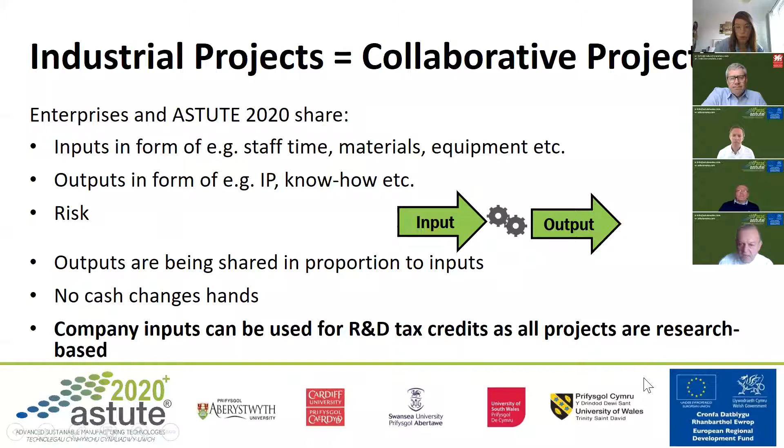Next slide, please. I think that's the end of my presentation, and we'll go now back to James.

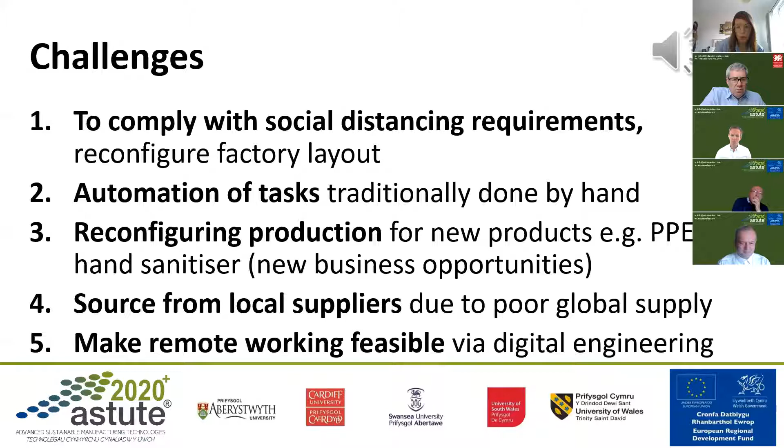So what we have done here with these opportunities is translate some of those COVID crisis-specific challenges into generic opportunities, things we may have done ourselves anyway in order to achieve operational excellence and continuous improvement, but sometimes the crisis actually gives us the motivation to do things more quickly. So for example, with regards to the first one, relating directly to the previous challenges from the previous slide.

With regards to social distancing, looking at our factory layout and ways to streamline our material flows and process flows gives opportunity to improve in terms of reducing non-value-add activities and enhancing the value add throughout our total manufacturing process.

With regards to automation and enhancing automation, looking at robotics, for example, to reduce material handling, the opportunities offered by our research in robotics. We can look at ways to reduce the amount of handling actually required by individuals, and looking at ways for individuals to be working with the robots, a whole systems perspective.

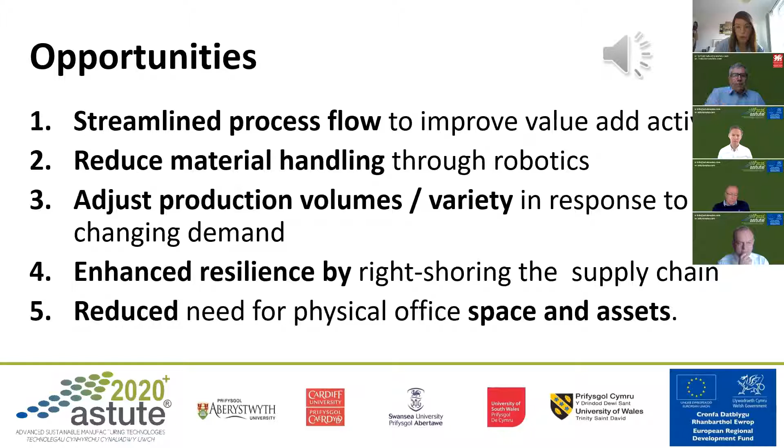What I'll do now, after highlighting these generic opportunities, is give you an overview of some examples, some cases where we've actually applied these manufacturing systems engineering methods and opportunities within specific companies. This gives you an idea of the range of manufacturing sectors that we have worked with.

So the first one here is medical devices, particular pumps for bed sore blankets. In this first example, we looked at new layout and in particular new ways of working, in this case via gravity feeders for materials handling, so avoiding direct contact in terms of relating it to COVID, avoiding direct contact between operators. This kind of gravity feed system and new layout led to productivity improvements.

The next one is an example of braking systems assembly in the automotive sector, the development of cobots, where we have within the same space both operators and robots. The main research challenge there is working safely, and in this case there will no longer be a need for robots to be hidden behind cages.

The next two examples are both different companies, but both analytical equipment manufacturers. The first one, where we looked at understanding and documenting current manufacturing processes, looking to enhance value-add activities within the manufacturing system, and identifying ways to enhance capacity.

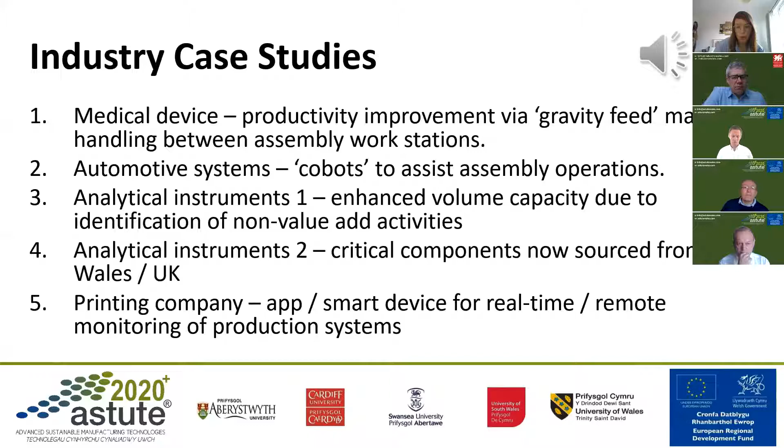Okay, thank you, James. Thanks. I'm glad you worked eventually.

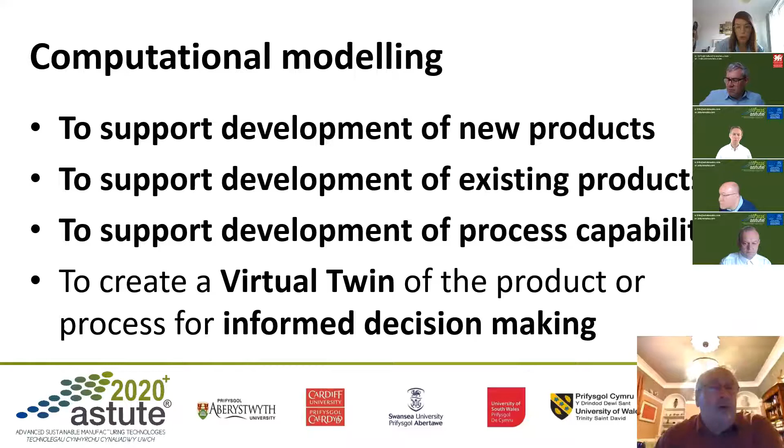Astute offers opportunities to undertake computational modelling, and the expertise in Astute can be set out under three main headings: structure mechanics, whereby we deal with statics, transient dynamic, and modal analysis; fluid dynamics, where we deal with mixing, separation, phase flows of fluids and gases; and the third area, which is thermal, electromagnetic, and acoustic. Of course, we can bring those all together into complicated multiphysics modelling, which has been used quite successfully to reduce prototyping cycles and enhance product and process performance.

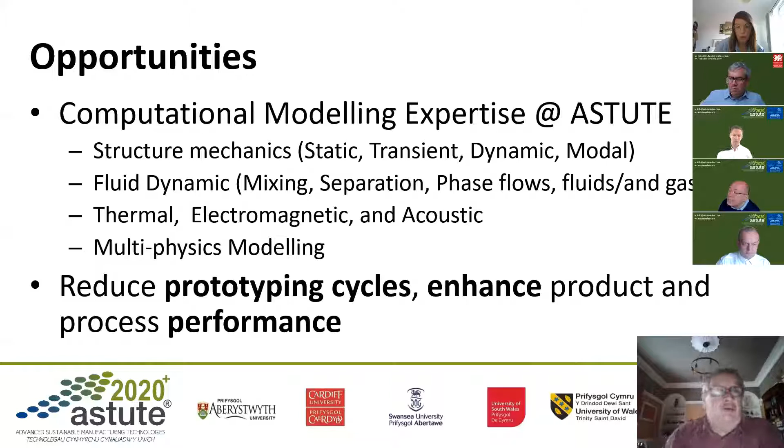We will now look at two industrial case studies undertaken by Astute. The first is aluminium tray forming, where the challenge is to form a perfectly rounded bead on the edge of the tray so they can be processed successfully in subsequent packaging operations. The second is laser trimming of a reverse extruded aluminium can, where the wavy edge around the top of the can must be removed by laser machining, and any particulate that is formed must be removed from the can.

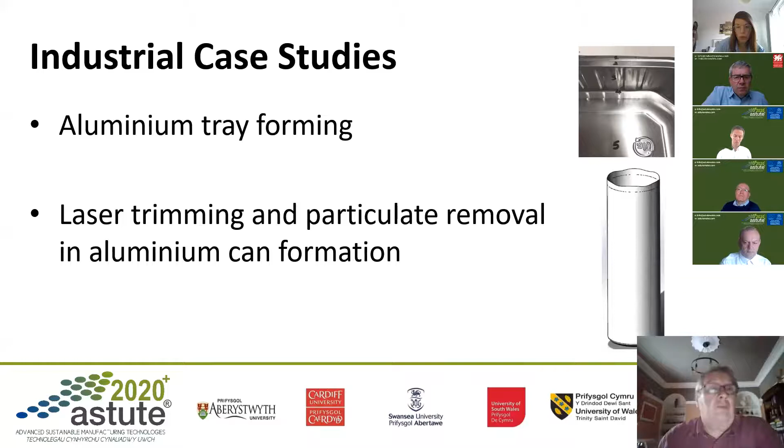We now look at the example of aluminium tray forming. Essentially, it comprises three steps: deep drawing, wiping, and curling.

Deep drawing is the way in which we manufacture the body of the tray itself. This is a complicated process in that you have a large deformation of what is originally a flat sheet of material. There is contact between the punches and the dies, and there's friction there. These parameters need to be incorporated into this part of the deep drawing module.

The wiping stage is whereby we take the flat edge formed at the top of the tray and bend it over as a wiping cycle. That bent over edge in the curling cycle is then rolled over to form the bead at the top of the tray. The next slide will show an animation of this process.

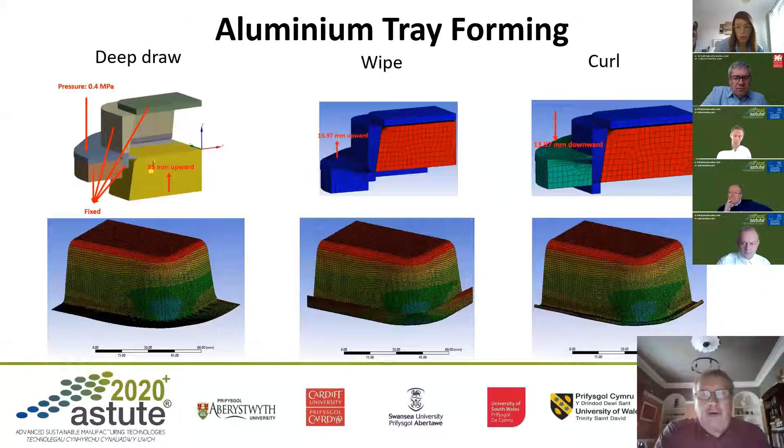This slide will show you the animation of aluminium tray forming. The sequence will show you the deep drawing, the wiping, and the curling stages of the process. It'll all appear very much as a sequence of complicated and controlled tool movements.

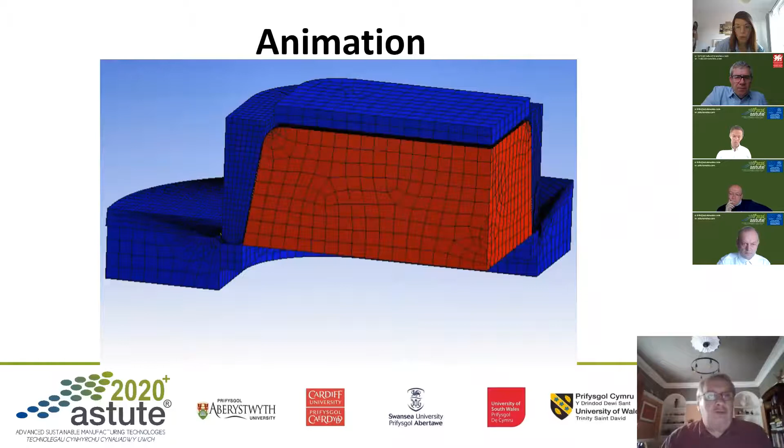This slide shows the outcome from the tray forming simulation. Inset, we see an example of the defect on the rolled edge. In doing this work, Astute worked very closely with the business partner, and at the end of all of this, identified 3 potential solutions to address the problem of the tray edge defect. These potential solutions are now being carried through and tested further by the company.

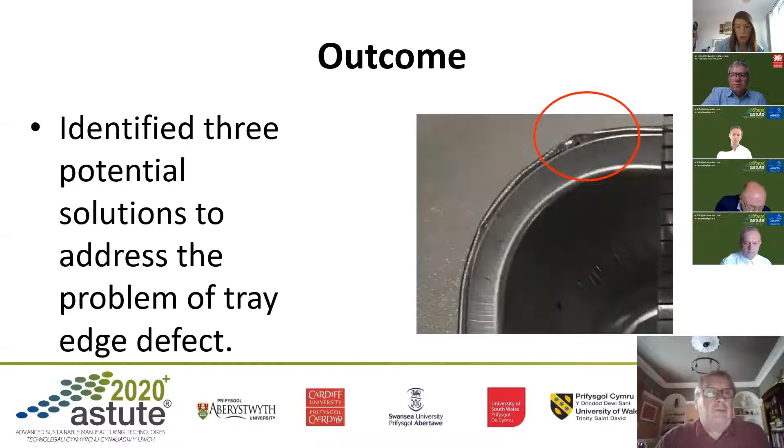This is the second industrial case study, whereby we're looking to trim the reverse extruded aluminium can. It's a 2-stage simulation. The first stage is the laser trimming itself, whereby we generate some particulate debris. The second stage is to look at the flow and ventilation in the can in order that we can remove that debris from the can prior to it going on to the next stages in operation.

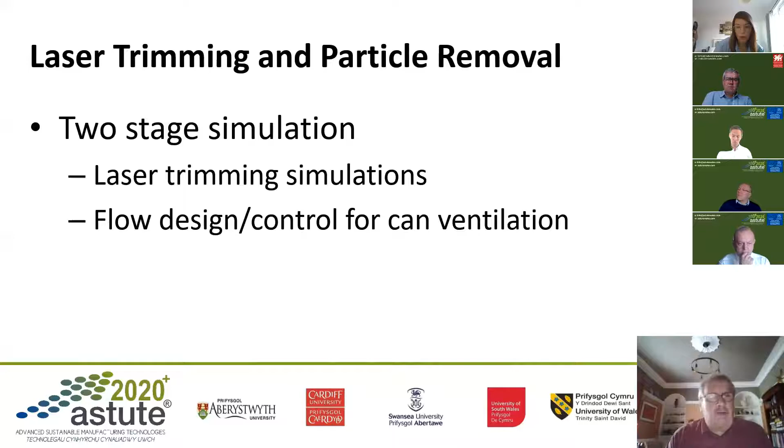This slide shows an example of the laser cutting process. It is complicated to simulate in that it has multi-phase flows, i.e. liquid and gaseous phases present. It is complicated by the fact that melting takes place, and if melting takes place, then the material properties are clearly temperature dependent as well. The model also has to account for the energy deposited onto the surface of the workpiece by the laser itself. What we see here is a laser beam radius, typically 50 microns, to give an indication of the size.

What we see in the animation on the right-hand side of the slide is the penetration of the laser into the workpiece and the removal of the particulate from the workpiece as it goes through.

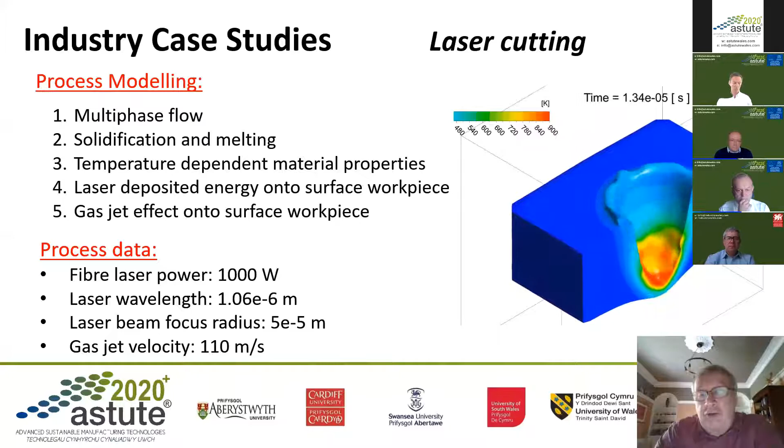This slide shows part of a parametric study into the ventilation of the can in order to remove the particulate. It should be noted that in this study, the can itself is rotating and that a gas jet is directed across the can at 0 degrees, which is across the diameter of the can, or at 15 degrees or 30 degrees, which is there to introduce a level of swirl within the can itself.

The model is complex and multi-physics, in that there's a particulate phase and a gas phase, and the two interact. The aim of the study is to look at the way the gas phase will cause particulate movement out of the can in order to clear the can of debris.

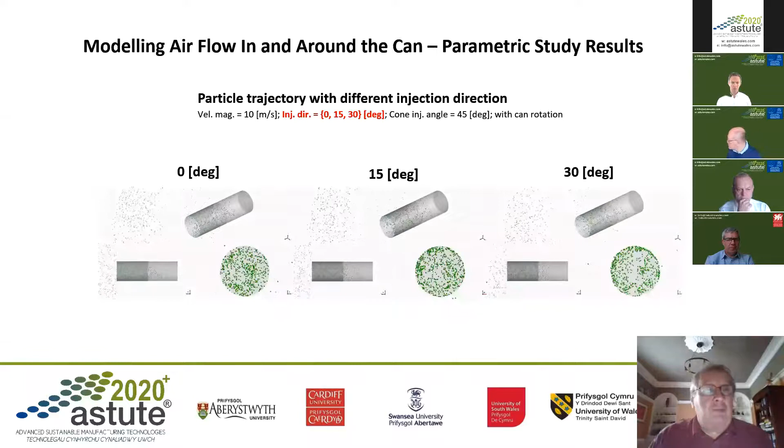This slide shows the outcome of the parametric study presented in the previous slide. What we see here is that, generally speaking, at 0 degrees, 15 degrees, and 30 degrees, there is little benefit, in that around about 48 to 51% of particulate remain within the can. Needless to say, there are other parts of the parametric study which showed that this was an effective method of particulate removal, and further work is ongoing at this time in order to improve the understanding of the ventilation process.

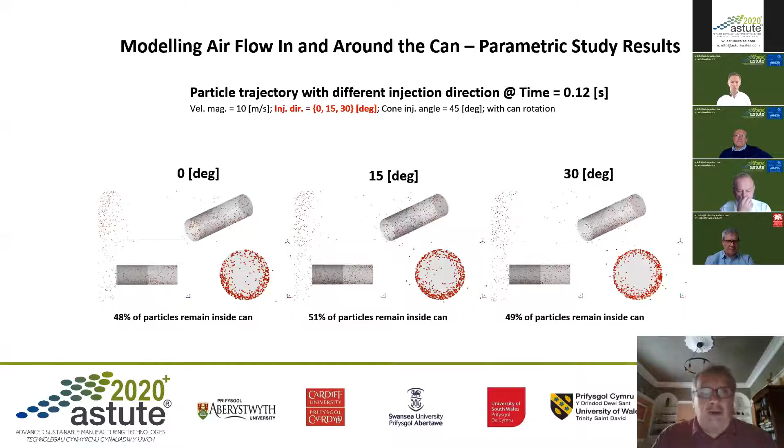So the outcome of the work on laser machining and can evacuation has developed what is really a process virtual twin, and that has aided the understanding of a challenge that has been in existence for a period of around about 7 years.

Complementary to this is the fact that the MD noted that this approach to solving this problem should have been taken much earlier, and the company is now actively pursuing the opportunities that have been provided from this simulation study.

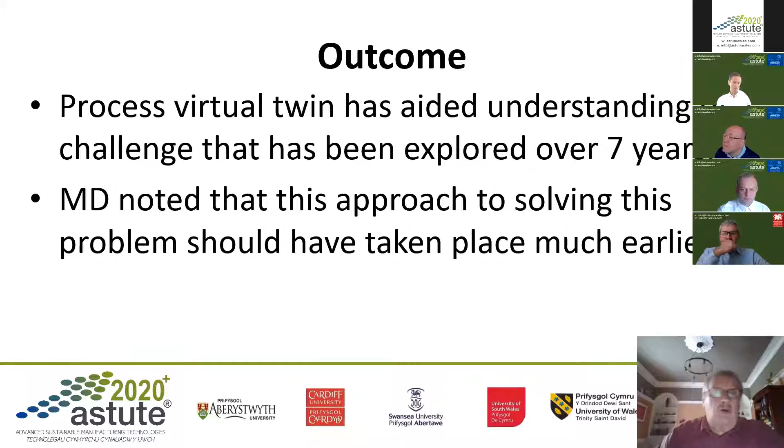Thanks, David. That was really good. I could have watched that for a bit longer. And I love the fact that we didn't get to know what the real perfect answer was yet. The ability to run so many different trials quickly is great.

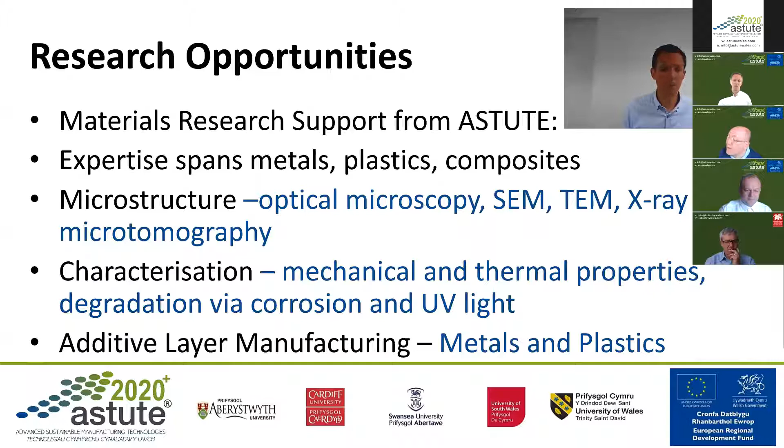Optical microscopy can be performed on cross-sections of materials, and we have state-of-the-art capabilities for metallographic preparation as well.

The SEMs are also equipped with energy dispersive X-ray analysis, which can reveal the chemical composition of, say, different phases or inclusions. In addition, there is also a focused ion beam, which can accelerate ions to selectively mill out areas of a sample to study composition variation as a function of depth.

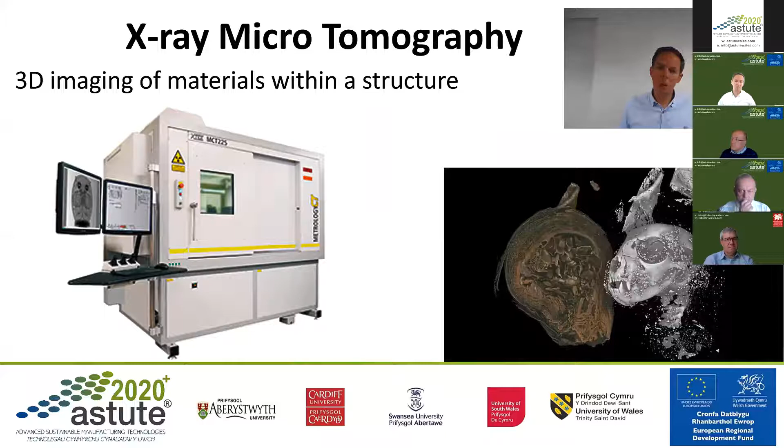So that's it on the microscopy side of things. Next, I wanted to highlight our metal additive layer manufacturing expertise and facilities. A lot of you will be familiar with 3D printing, and as well as your common polymer 3D printers, we also have state-of-the-art metal additive layer manufacturing, which prints directly from metal powders.

This can achieve very intricate shapes that can't be produced by traditional casting techniques. 3D printing can cut material consumption and CO2 emissions within certain applications. It can also support design optimization and is useful in low volume production scenarios, such as spare parts for an aircraft where they're printed to order. So automotive, aerospace, and defense are currently the largest manufacturing sectors using this technology. However, it's also now being used within dental printing, medical implants, and device printing and product creation.

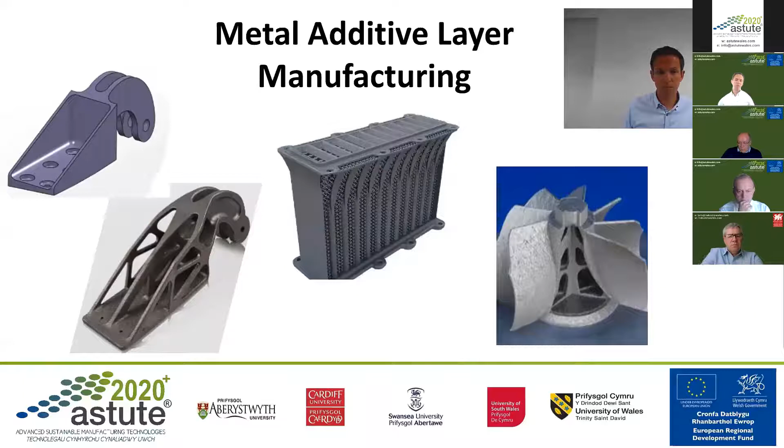This is an example of one of the ALM machines, Renishaw machines. It works by a bed of powder being laid down, the laser scans the surface and selectively melts powder particles that correspond to the region of a component. It's built up layer by layer as more powder is deposited. Unused powder can then be removed and reused. We also have a post-processing facility called a hot isostatic press, which provides a combination of high temperature and high hydrostatic pressure to close up any residual porosity.

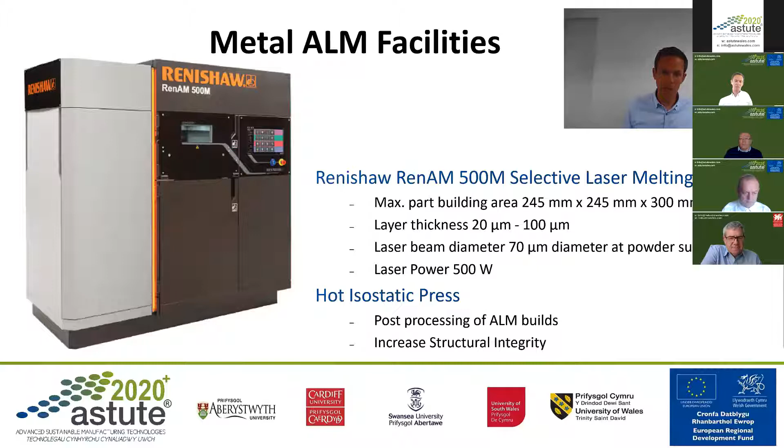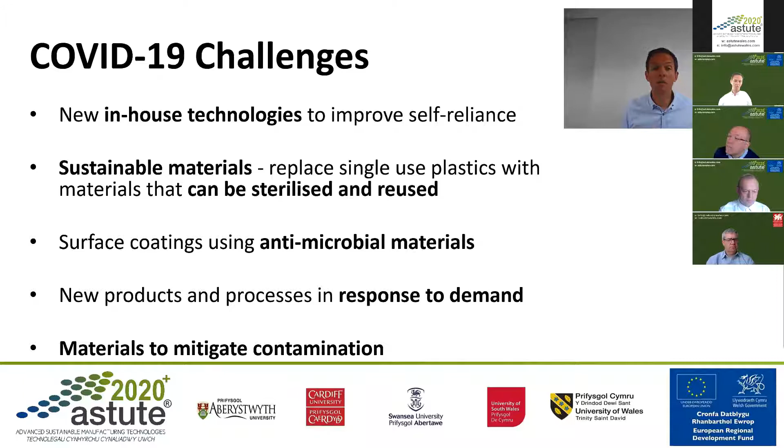So that's it on the facilities. Next, I really wanted to highlight what the current pandemic poses for material selection and materials challenges. It poses challenges for us all. There are some specific materials challenges associated with COVID-19, for example the need for sterilization of products or other cleaning techniques to be applied. We need to consider implications for the materials: will they withstand temperatures and/or chemical agents used? There's a need for antimicrobial products and coatings. New ways of doing things post-COVID may lead to demand for new products. Also, as one would expect, there is need for more advanced medical products and devices, and it is an example of this I want to highlight next.

So Corona Vent 1. This case study provides an example of how Astute rapidly responded to the urgent need for manufacturing a prototype ventilator. The ventilator was built quickly from local parts and can be used even for patients with severe coronavirus. It was built within 10 days from locally available materials and skills. And I've got a video now showing this.

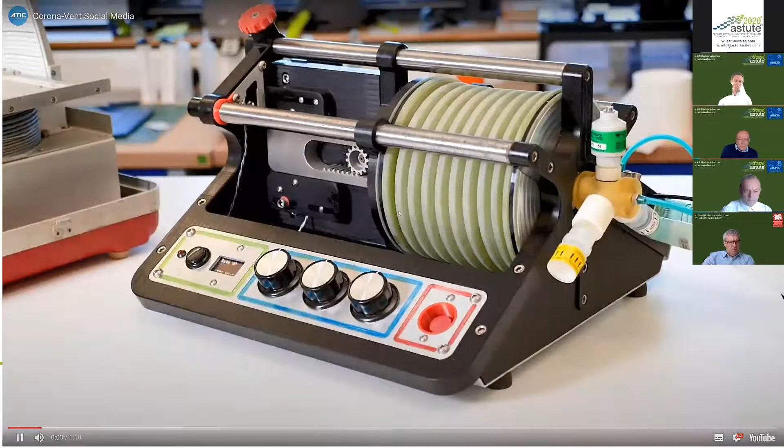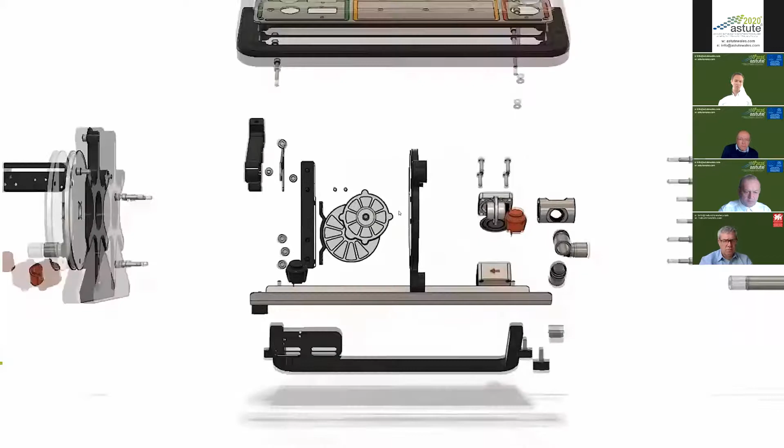The Corona Vent 1 was built in 10 days from commonly available materials using locally available skills. It has the minimum possible number of specialist medical parts. It's completely optimized for the types of lung problems seen in COVID patients.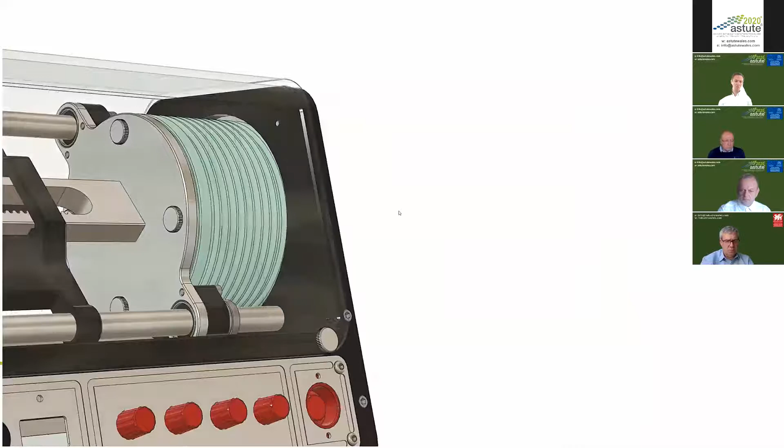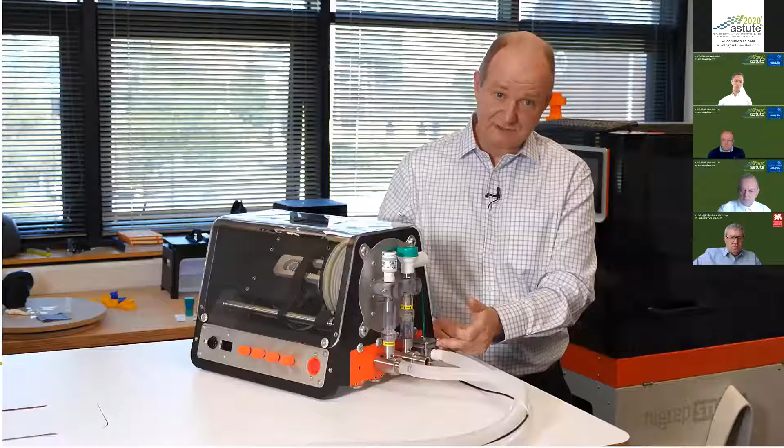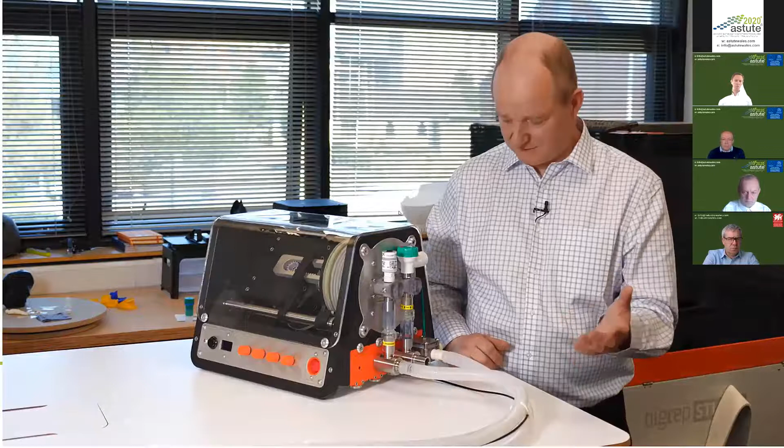We're currently developing Corona Vent 2. The differences from the initial prototype are that it's splash proof. The gas now enters through this port here. The check valves can be any design that you have available. The exhale gas comes through this diaphragm valve, which again can be made by 3D printing, or it can be machined from stainless steel. If you wish to clean the inspiratory side of the system, the bellows unit unclips on the inside and the whole thing is extracted through the end here. So the entire gas pathway can be dismantled for cleaning, but particularly the expiratory side is just this part here, which comes off very quickly.

So I think that was an interesting case study showing how we responded quickly and efficiently to produce a prototype ventilator. To summarize, we have leading edge materials analysis and characterization facilities supported by world-leading academics, and we can work with companies, responding quickly and efficiently to help them innovate and develop new products and services. Thank you.